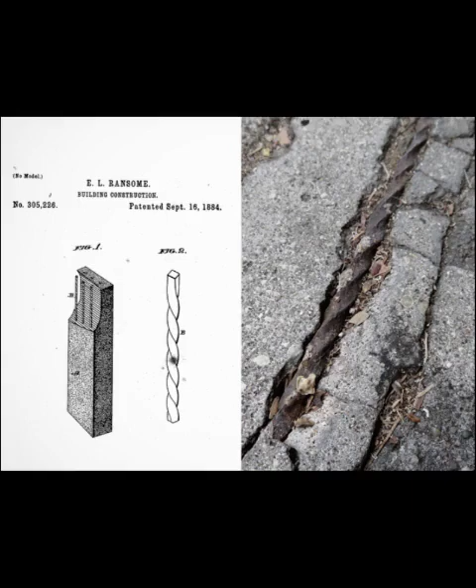The structure would collapse, killing everyone inside. Yet Melville E. Ingalls spent 2 years fighting city officials for a building permit, insisting his vision would stand. He wasn't proposing steel beams clad in masonry like every other skyscraper in the country. He wanted to pour liquid stone from the ground to the roof, creating a monolithic giant that defied every accepted principle of construction. The city said no. The engineers said impossible. But Ingalls knew something they didn't.

A secret hidden in twisted metal that would change construction forever. To understand how the Ingalls building survived when it should have failed, you have to see what really happened in those 8 months of construction, and what one California inventor discovered about the marriage of concrete and steel.

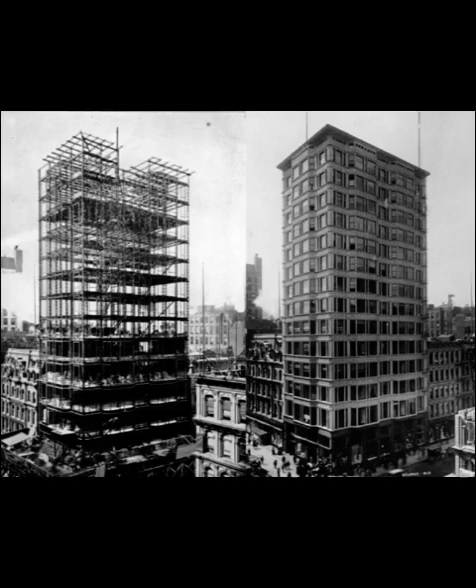The year 1903 belonged to steel. Across America, skyscrapers rose on frameworks of riveted iron beams, their skeletons visible against city skylines before masons arrived to wrap them in brick and stone. This was the proven method, the safe method. Steel carried the load while concrete served merely as fireproofing, poured between beams to protect them from the flames that had consumed so many wooden structures in the previous century. The tallest buildings in New York, Chicago, and Philadelphia all followed this formula.

When architects spoke of concrete in structural terms, they meant foundations and basements, the invisible parts buried beneath streets where failure wouldn't kill pedestrians. The material had a reputation problem. It cracked unpredictably. It weakened under tension. It couldn't span distances or support the concentrated loads that tall buildings demanded. Every structural engineer learned these limitations as fundamental truth.

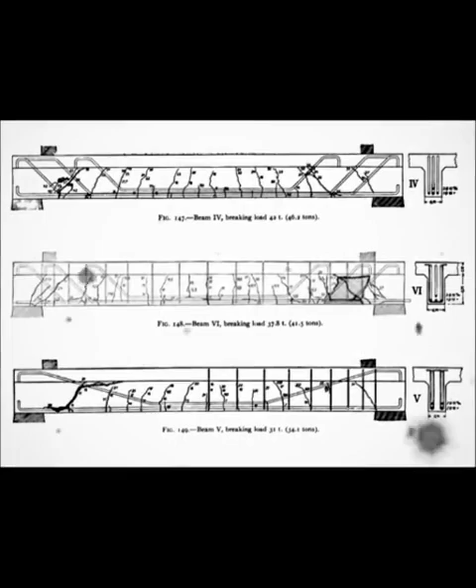But in San Francisco, a 59-year-old English immigrant named Ernest Leslie Ransome had been conducting quiet experiments that challenged conventional wisdom. Since arriving in America in 1870, Ransome had watched concrete fail in precisely the ways engineers predicted. He'd seen slabs crack under modest loads, beams sag and fracture, floors collapse during construction. The material possessed tremendous compressive strength. It could bear enormous weight pressing down on it. But the moment tension entered the equation, pulling rather than pushing, concrete failed catastrophically.

Ransome understood that every beam spanning a gap experiences compression on its top surface and tension on its bottom. Concrete alone would always crack at the tension point. The solution seemed obvious: embed something strong in tension within the concrete itself. Iron bars had been tried before with mixed results. The bars slipped within the concrete matrix, failing to transfer loads effectively. The bond between materials wasn't strong enough.

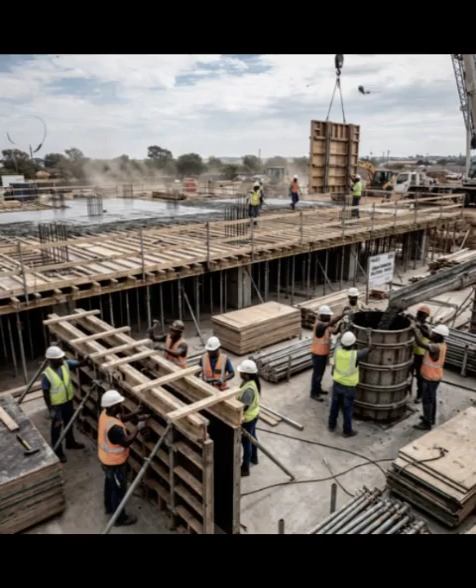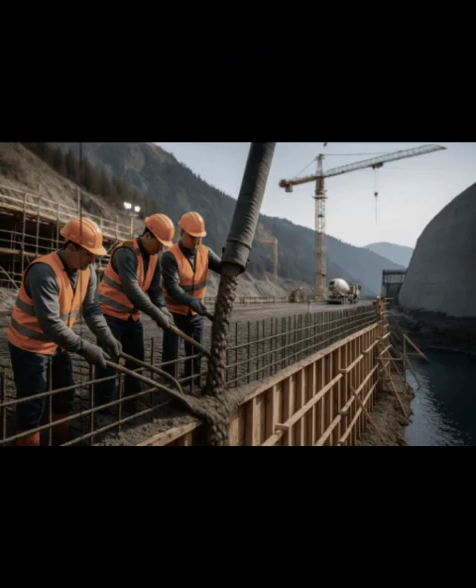On September 16, 1884, Ransome received U.S. Patent 305,226 for a deceptively simple innovation. He'd been testing iron bars with various surface treatments when he realized that square bars, when cold twisted along their length, created spiral ridges that locked mechanically into concrete. The twist transformed a smooth interface into a threaded connection. As concrete cured around these twisted bars, it gripped the spiral surfaces with tremendous force. When tension pulled on the reinforcing bars, the concrete couldn't release them.

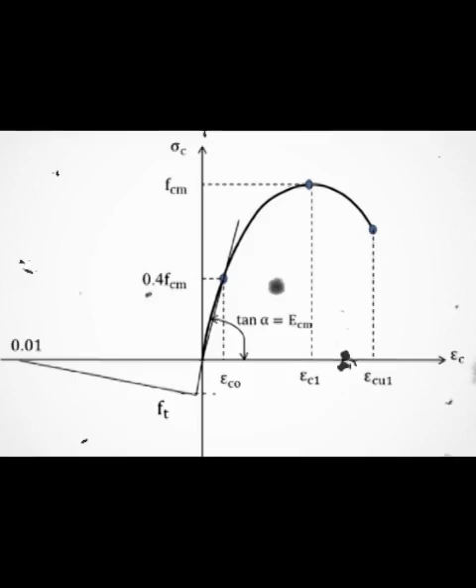The two materials became genuinely composite, each compensating for the other's weakness. Concrete provided compressive strength and protected steel from fire and corrosion. Steel provided tensile strength and prevented concrete from cracking. Together, they created something stronger than either material alone. Ransome called it reinforced concrete, though composite construction might have been more accurate.

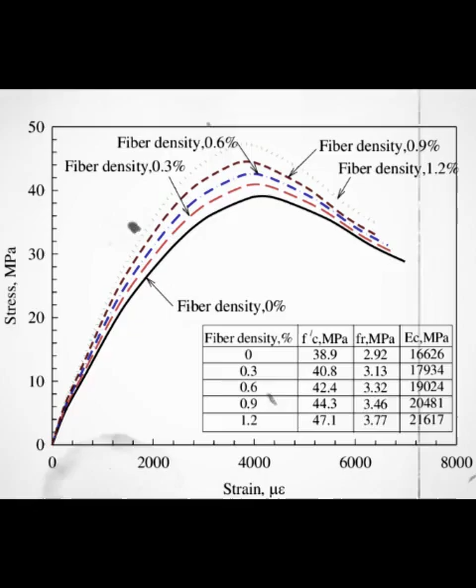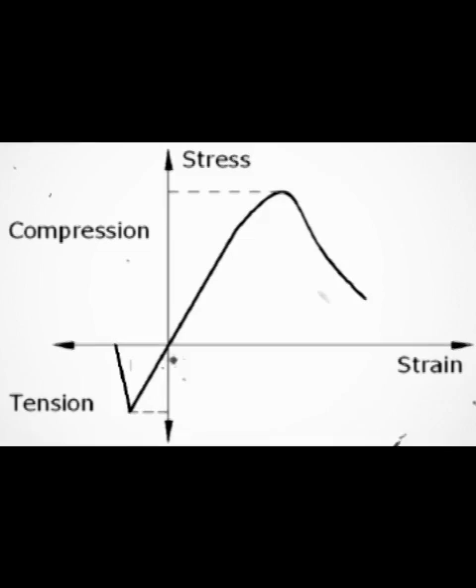For nearly 2 decades, Ransome built steadily larger structures to prove his system. In 1889, he constructed the Leland Stanford Junior Museum in Palo Alto using reinforced concrete, a building that survived the 1906 San Francisco earthquake, while unreinforced masonry structures around it collapsed into rubble. He built factories, warehouses, and bridges, each project pushing the limits slightly further. He published technical papers explaining his calculations and construction methods. Slowly, a handful of progressive engineers began to pay attention.

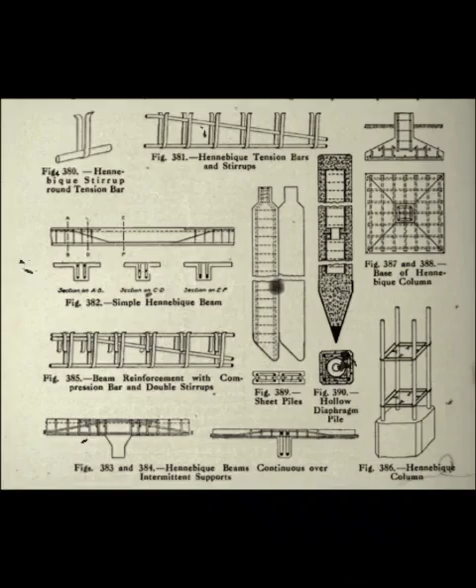The material offered advantages beyond structural performance. A reinforced concrete building required no structural steel, eliminating dependence on steel mills and their fluctuating prices. It provided superior fire resistance, crucial in an era when urban fires regularly consumed entire districts. Construction could proceed with less skilled labor since pouring concrete into forms required different expertise than riveting steel beams hundreds of feet in the air. The economics appealed to developers looking to build quickly and cheaply. Melville Ezra Ingalls saw these possibilities clearly.

A railroad executive and real estate developer, Ingalls had watched Cincinnati's downtown core expand with steel frame buildings that required expensive fireproofing and lengthy construction schedules. He'd read Ransome's technical papers and visited several reinforced concrete structures in California. The system worked at modest scales. Could it rise to skyscraper height?

No one had tried. The highest reinforced concrete building in 1901 stood just 6 stories tall. Engineers cited specific reasons for this ceiling: the cumulative weight of concrete floors would crush lower columns, wind loads would crack the monolithic structure, and the building would be too heavy for typical urban soils.

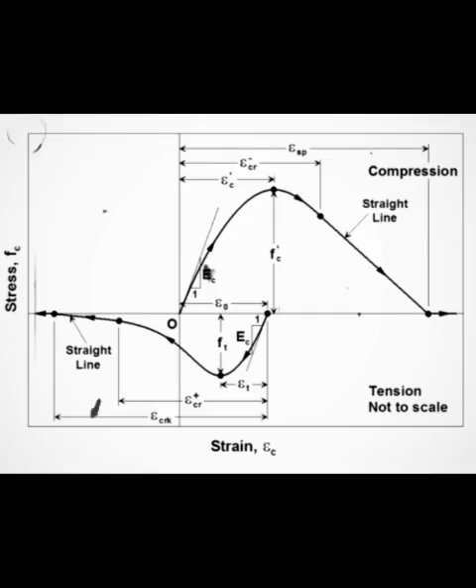Ingalls believed these objections could be overcome with proper design. In 1901, he approached the architectural firm of Elzner & Anderson with an audacious proposal: design a 16-story office building constructed entirely of reinforced concrete, using Ransome's twisted bar system. Alfred Oscar Elzner accepted the challenge.

Born in Cincinnati in 1862, Elzner had studied at the Ohio Mechanics Institute and later at MIT, training in both art and engineering. He understood structural systems as deeply as aesthetic principles.

For the Ingalls building, Elzner designed a pure frame structure where every column, beam, floor slab, and foundation wall would be cast in place as a continuous, monolithic unit. The building would measure 50 feet along 4th Street and 100 feet along Vine Street, rising to 210 feet above grade. Each floor would act as a rigid diaphragm, tying the structure together and distributing wind loads across all vertical elements.

The design called for columns measuring 18 by 24 inches at upper floors, expanding to massive sections at ground level to support the accumulated weight of 15 floors above. The entire framework would be poured in sections, with each floor tied to the columns and each column keyed into footings driven deep into Cincinnati's clay soils.

The design was sound on paper. Convincing city officials proved far more difficult. Cincinnati's building department had no provisions for evaluating reinforced concrete structures. Existing codes addressed steel frame construction and load-bearing masonry. They specified nothing about twisted reinforcing bars, monolithic pours, or composite structural action.

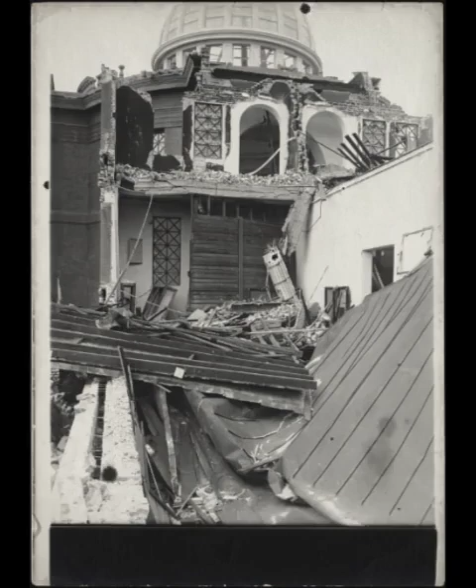The building inspector's primary concern was public safety. If this experimental building collapsed during construction or occupancy, the death toll could be catastrophic. For 2 years, Ingalls lobbied, arguing, explaining, and providing calculations. He brought in structural engineers to review Elzner's plans, cited Ransome's successful projects, and offered to have the completed structure tested beyond normal requirements.

The building department remained skeptical. Concrete buildings were 6 stories tall. This one proposed 16. The leap seemed reckless. What finally convinced officials remains partially obscured by history, though records suggest a combination of economic pressure and structural guarantees.

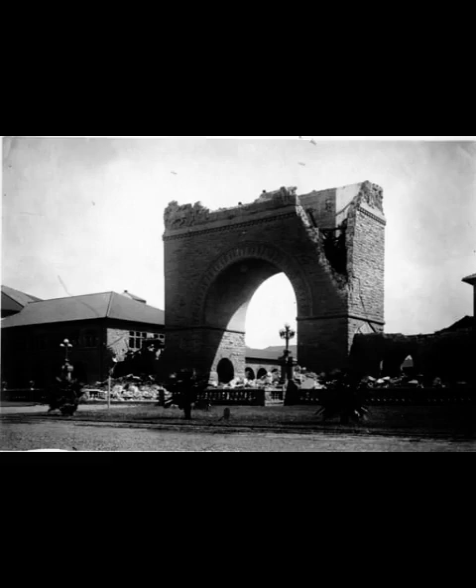Cincinnati's business community wanted modern office space. Ingalls committed to rigorous inspections during construction. Most crucially, preliminary cost estimates revealed significant savings. The contract price came in around $500,000, roughly 20% less than a comparable steel frame structure would have cost. When Elzner demonstrated that steel framing would have required approximately $575,000 for the same building, the economic argument became compelling.

In early 1902, the building permit was finally issued. Construction could begin. The site preparation commenced in August 1902. Workers excavated to bedrock, removing tons of earth and unsuitable soil. The foundation design called for massive concrete footings beneath each column, distributing loads across sufficient area to prevent settling.

These footings were poured first, using plain concrete without reinforcement since they worked entirely in compression, bearing weight into the earth. As footings cured, carpenters began constructing formwork, the temporary wooden molds that would shape liquid concrete into columns and beams. This formwork represented one of the project's great challenges.

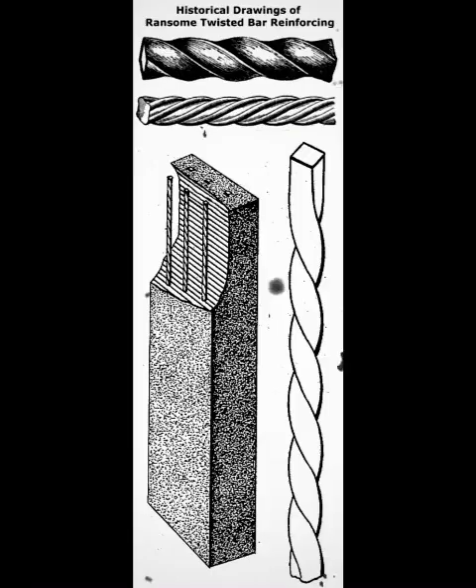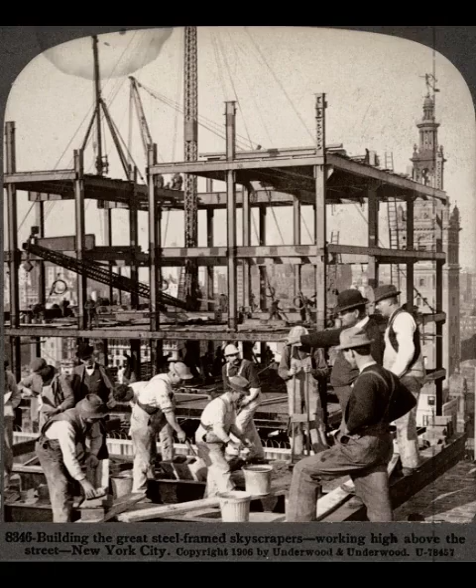Thomas Edison would note just a year later, in 1903, that concrete construction absurdly required erecting 2 wooden walls to get 1 concrete wall, an observation painfully accurate for the Ingalls building. Every column required a 4-sided wooden box built precisely to dimension. Every beam needed a horizontal form suspended at the exact height. Every floor slab demanded a complete wooden deck supported by temporary posts. The volume of lumber and carpentry labor exceeded anything required for steel frame construction.

The concrete itself came from local suppliers who mixed Portland cement with sand, gravel, and water in proportions specified by Elzner. The mixture had to be fluid enough to pour into forms and flow around reinforcing bars, yet stiff enough to develop strength as it cured. Too much water made for easy pouring but weak concrete. Too little created a stiff mix that wouldn't consolidate properly, leaving voids around reinforcement.

The work proceeded floor by floor. Reinforcing bars were positioned in forms according to engineering drawings, bars twisted to Ransome's specification, creating those crucial spiral ridges.

In beams, bars ran longitudinally near the bottom surface where tension would occur. In floor slabs, bars formed grids to resist bending in multiple directions. Vertical bars in columns extended upward, waiting to be tied into the bars of the next floor's columns, creating continuous steel threads running from foundation to roof.

Once reinforcement was positioned and formwork inspected, the concrete arrived. Workers shoveled the wet mixture into forms, using tools to work it around reinforcing bars and eliminate air pockets. This was brutal physical labor. Concrete arrived in wheelbarrows and buckets, hauled by hand to wherever it was needed. There were no mechanical pumps or mixing trucks in 1903. Every cubic yard of concrete moved by human muscle.

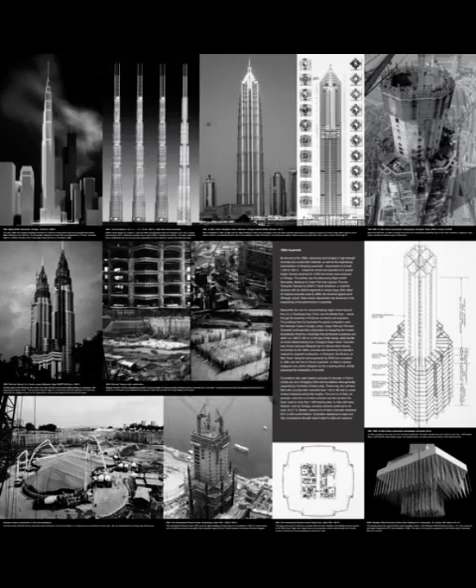After concrete was poured, it needed time to cure, to develop its characteristic strength through chemical reactions between cement and water. Engineers knew concrete gained most of its strength in the first 28 days, though it continued hardening for months afterward. This meant formwork couldn't be stripped too early. The concrete had to cure sufficiently to support its own weight plus the weight of workers and materials for the next floor. Timing these operations required judgment and experience.

Strip forms too early and green concrete could crack or sag. Wait too long and construction slowed to an expensive crawl. The construction crew walked a careful line, testing concrete strength by eye and feel, removing forms when the material seemed ready. Throughout construction, skeptics waited for failure.

Engineers from rival firms visited the site, examining the rising structure for signs of distress. Newspapers reported on progress, noting the unusual building method. Some predicted collapse. Others suggested cracks would appear as the structure gained height and weight.

The concrete, however, performed exactly as Elzner and Ransome had calculated. The monolithic structure distributed loads efficiently. The twisted reinforcing bars prevented cracking at tension points. The rigid floor slabs tied columns together, preventing buckling.

As the building rose past 6 stories, then 8, then 10, doubt gradually transformed into cautious acceptance. This might actually work. The human cost of construction remains less documented than the technical achievement, though scattered records suggest the work environment was dangerous in ways both familiar and unique to concrete construction.

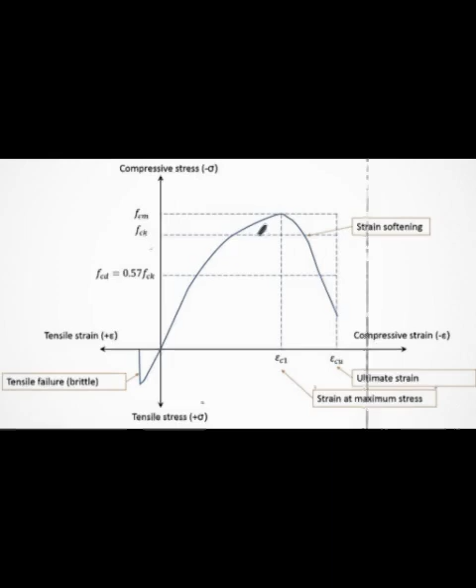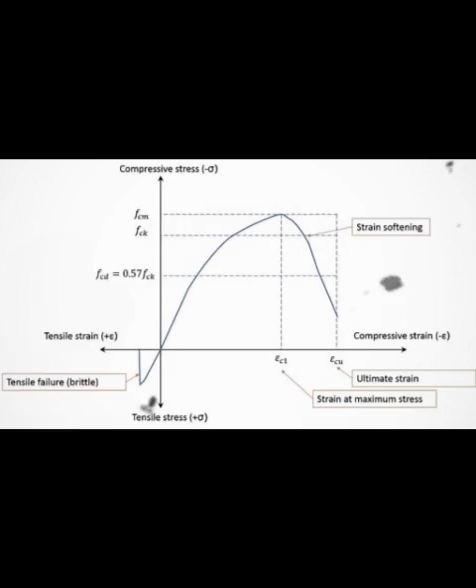By spring 1903, the structure was complete. The formwork came down, revealing the gray concrete surfaces beneath. The building stood. It didn't crack. It didn't settle excessively. It didn't collapse.

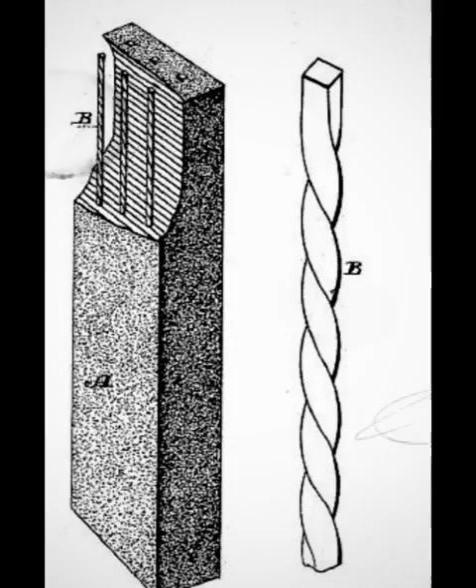Melville Ingalls had been right. Alfred Elzner's calculations held true. Ernest Ransome's twisted bar system worked at skyscraper scale. The 16-story Ingalls building became the world's first reinforced concrete high-rise, proving that the material could compete with steel for tall building construction.

The exterior was clad in white marble at the lower 3 floors, with brick and terracotta above, following Beaux-Arts architectural traditions. But beneath that decorative skin, the structure was pure concrete and steel working in composite action, a genuine innovation in structural engineering.

The building opened for occupancy in May 1903. Tenants moved into office spaces that were quieter than steel frame buildings, which transmitted noise and vibration through their rigid frameworks. The concrete structure provided excellent fire resistance. Maintenance costs proved lower than steel buildings, which required periodic painting and inspection of riveted connections.

Insurance companies, initially wary, gradually accepted reinforced concrete as equally safe. Other developers took notice. If concrete could rise to 16 stories in Cincinnati, why not 20 stories or 30? The technical barrier had been broken. Ernest Ransome never saw the full flowering of his invention.

He continued working into his 60s, building pioneering concrete structures across America, but died in 1917 before reinforced concrete truly dominated tall building construction. That dominance came later, in the 1920s and beyond, when engineers refined the system and developed comprehensive theories of reinforced concrete behavior.

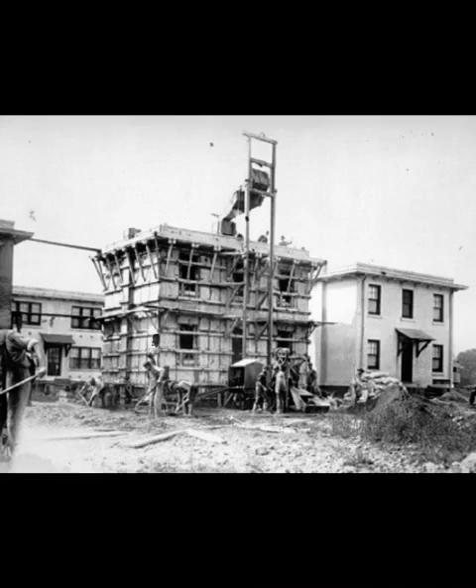What Ransome, Elzner, and Ingalls achieved in 1903 was the crucial proof of concept, the first demonstration that reinforced concrete could rise to respectable height, support real loads, and remain standing year after year.

The Ingalls building still stands today at 4th and Vine, now operating as a courtyard by Marriott Hotel after a renovation completed in 2020. The concrete poured in 1902 and 1903 continues bearing its intended loads, more than 120 years after construction. Modern engineers who have examined the structure express professional respect for the design and execution.

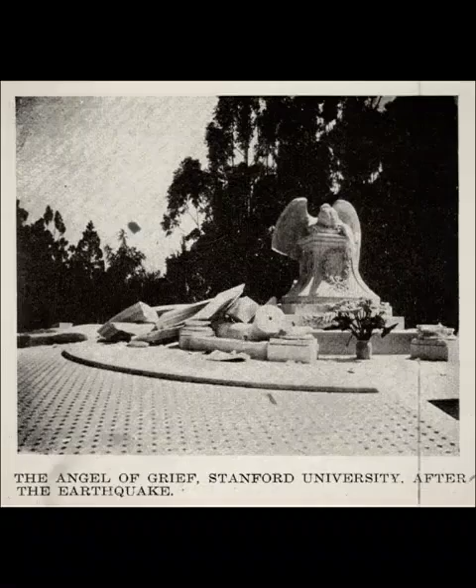The reinforcing bars, protected from corrosion by concrete cover, remain largely intact. The columns and beams show the normal wear of a century, but no structural distress. The building has survived not just gravity loads, but also the thermal cycling of 120 summers and winters, seismic tremors, windstorms, and the cumulative vibrations of urban life.

This longevity raises questions about our current approach to construction. Modern concrete buildings are typically designed for 50 to 100-year service lives, with the expectation that reinforcing steel will eventually corrode and require structural intervention. Yet the Ingalls building, designed with 1903 knowledge and materials, has lasted well beyond such projections.

Partly this reflects conservative design. Elzner's calculations included substantial safety margins because the structural behavior was incompletely understood. The building is likely over-designed by modern standards, with more concrete and reinforcement than strictly necessary. But it also demonstrates that well-executed reinforced concrete, when properly detailed and protected, can achieve remarkable durability.

The broader legacy extends beyond any single building. The Ingalls building proved that concrete could compete with steel in the vertical dimension, opening new possibilities for architects and engineers. Through the 20th century, reinforced concrete enabled structures that would have been impossible in steel: thin shell roofs spanning vast spaces, cantilevered balconies extending from facades, sculptural forms following curves and complex geometries.

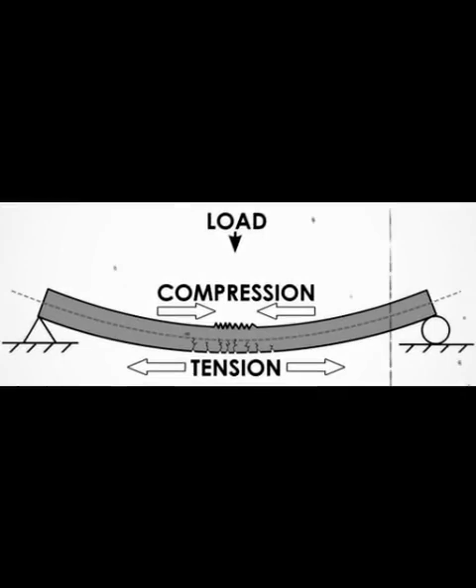Architects like Frank Lloyd Wright, Le Corbusier, and Oscar Niemeyer exploited concrete's plastic quality, its ability to be cast into almost any shape. Engineers like Pier Luigi Nervi and Felix Candela pushed the structural possibilities, creating concrete structures of breathtaking elegance and efficiency. Today, reinforced concrete is so commonplace that we rarely consider its revolutionary nature.

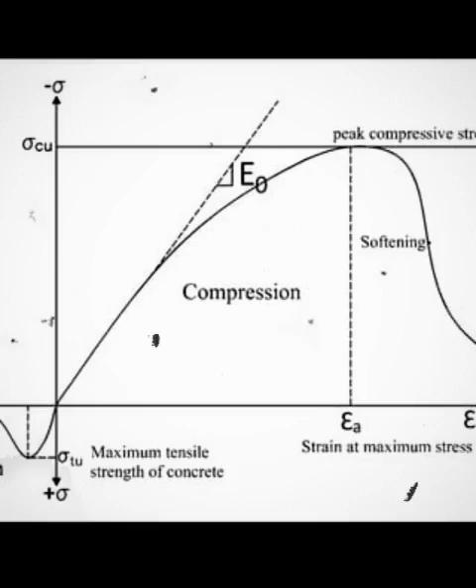Nearly every building, bridge, and infrastructure project uses the material. Global concrete production exceeds 30 billion tons annually. The fundamental system, steel bars embedded in concrete, working in composite action, remains essentially unchanged from Ransome's 1884 patent.

Modern variations include higher strength materials, better understanding of structural behavior, and improved construction techniques, but the core principle persists. Concrete resists compression. Steel resists tension. Together, they create a structural material that has literally reshaped the built environment.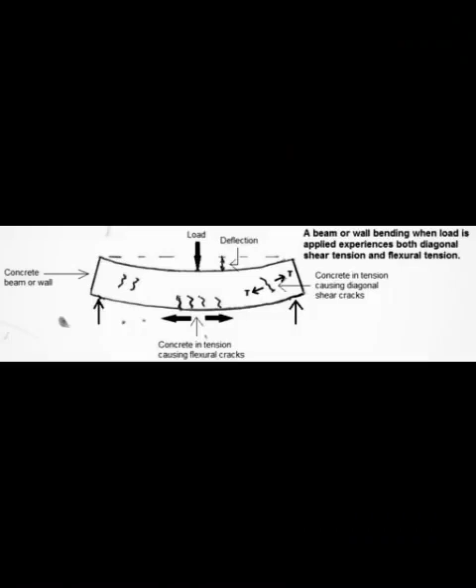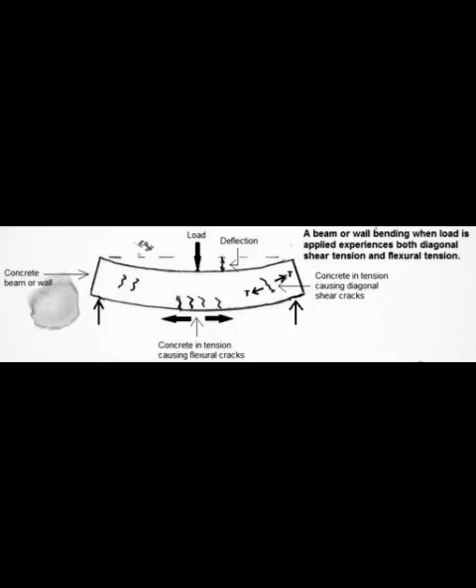Yet this ubiquity brings environmental costs that Ransome, Elzner, and Ingalls never considered. Cement production, the crucial ingredient in concrete, generates roughly 8% of global carbon dioxide emissions. The industry's contribution to climate change is enormous.

As we confront this reality, engineers and materials scientists are developing alternatives: geopolymer cements, carbon-sequestering concrete mixes, structural systems that use less material more efficiently. The challenge is finding solutions that preserve reinforced concrete's advantages while eliminating its environmental damage. This may require innovations as fundamental as the twisted bar was in 1884.

Standing before the Ingalls building today, you're looking at the physical evidence of a moment when conventional wisdom was overturned by careful engineering and calculated risk.

Melville Ingalls fought for 2 years to build something everyone said was impossible. Alfred Elzner designed a structure that pushed beyond established limits. Ernest Ransome developed a material system that would transform construction globally. They succeeded because they understood structural principles deeply enough to challenge accepted constraints.

They built not just a building, but proof that progress requires willingness to test new approaches against real-world conditions. The question now is what constraints we're accepting as unchangeable when they're actually just limitations waiting to be overcome.

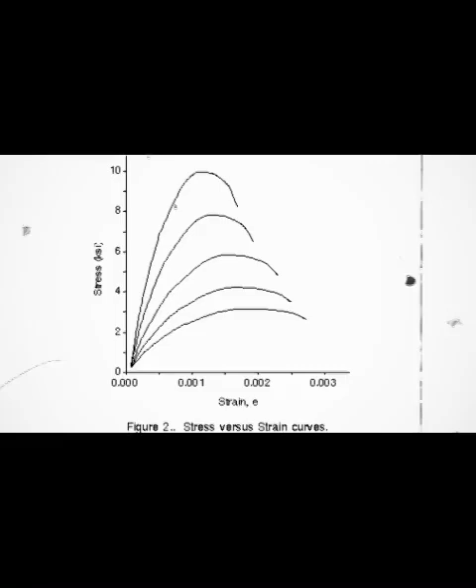In 1901, concrete buildings couldn't rise beyond 6 stories, except they could, and did, once someone tried with proper engineering. What are we assuming can't be done with current materials, current methods, current thinking? How many innovations remain locked behind assumptions that have never been properly tested?

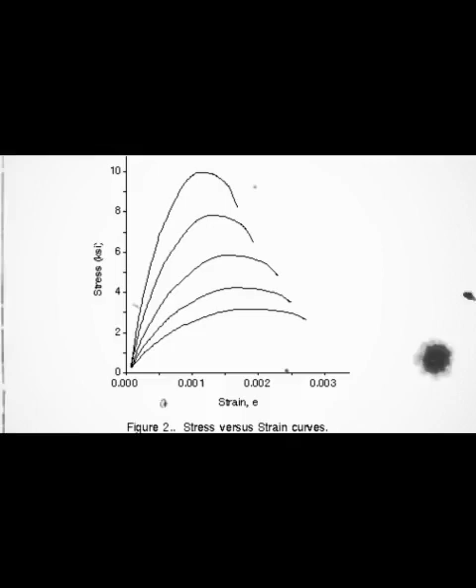The Ingalls building stands as a permanent reminder that impossible is often just unexplored, that the limits we accept are frequently the limits we create.